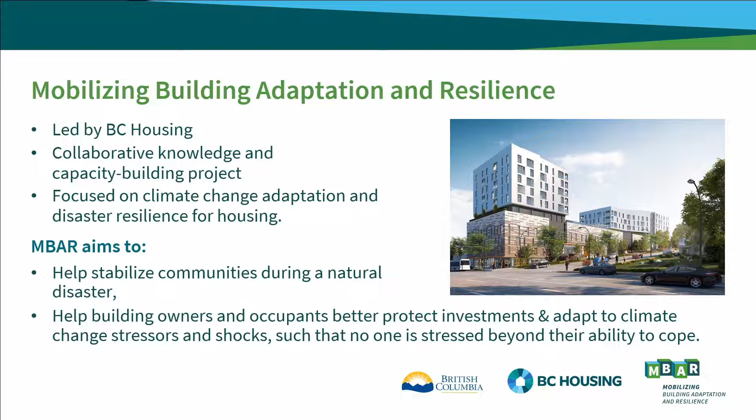So in previous sessions, we focused a lot on the structural performance of a building, the behavior of the structural system, the means to try and make it perform better than code to a level perhaps of no structural damage. But what the structure supports are all the other aspects of a building to make a building habitable or functional: mechanical, electrical, architectural components, and equipment. So what are the specific requirements for occupants to remain in the building or the building to be functional for all weather conditions after that design code level earthquake?

Currently, there are no worldwide standards. There's nothing specific in the current building codes regarding performance of the inner workings of all these pieces of equipment and components. What the code is focused on is ensuring the seismic restraint of the equipment and components is adequate so the components don't move from the floor or the wall or the ceiling that they're connected to, but nothing about the actual inner workings due to strong shaking.

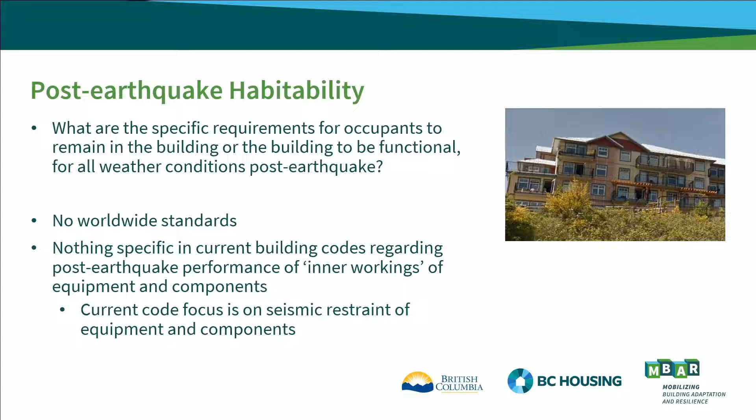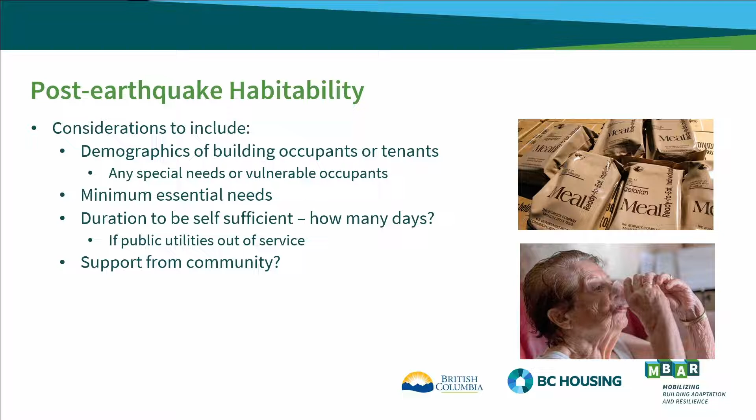So in considering post-earthquake habitability, some of the considerations are: what are the demographics of the building occupants and tenants? Are there any special needs, any vulnerable occupants? That may make the post-earthquake requirements different for each building. Listing out what are the minimum essential needs after an earthquake if all the occupants or tenants want to remain in there. And if so, for how many days? Is it the intent to be self-sufficient if all the public utilities coming into the building are out of service for a certain amount of time? Or can a certain amount of support be relied on from the community?

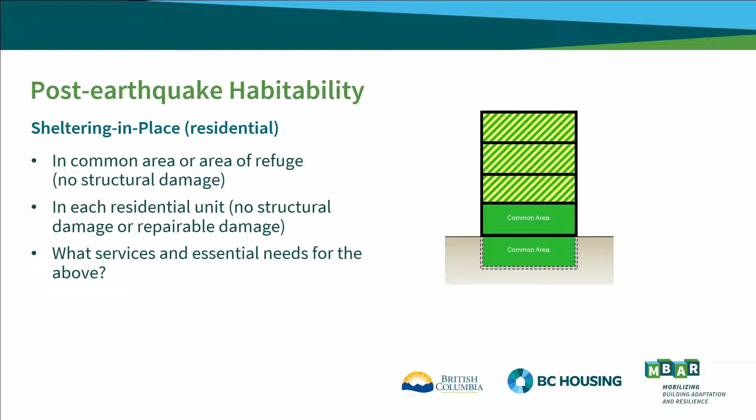And again, in the design of a new building, these are some of the things that need to be considered. Power. What are the minimum requirements for cooking, either in those areas to stay in their units above or in that common area down below? One elevator or all the elevators? The amount of lighting, the amount of heat, the amount of ventilation, all these to meet those minimum defined essential needs for the various different parts of the building.

Water. How many days should be stored on site for drinking, cooking, and personal hygiene? Sanitary, if the utilities outside the building no longer function. And again, there's an opportunity in every new building to customize and tailor these requirements for that particular group of tenants or occupants.

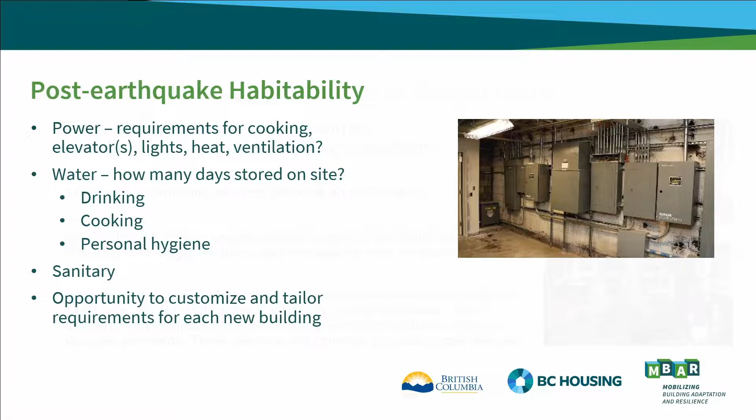These are some examples from an owner's contract with the design team to address this post-earthquake habitability and to ensure the design team takes this under consideration in their design. And these are words taken from the actual owner engineering contract: the need for continuing services following an earthquake.

The facility will remain operational and usable for its intended functions during and immediately after an event, and a list of essential services to be designed and constructed to post-disaster standards. However, these services will continue to function post-disaster. So these kinds of words can be put into a design requirement to ensure an owner is getting that level of performance from these components and equipment during and after the earthquake.

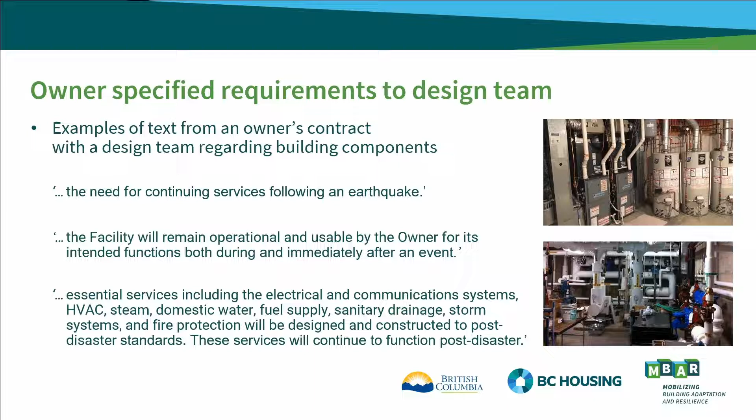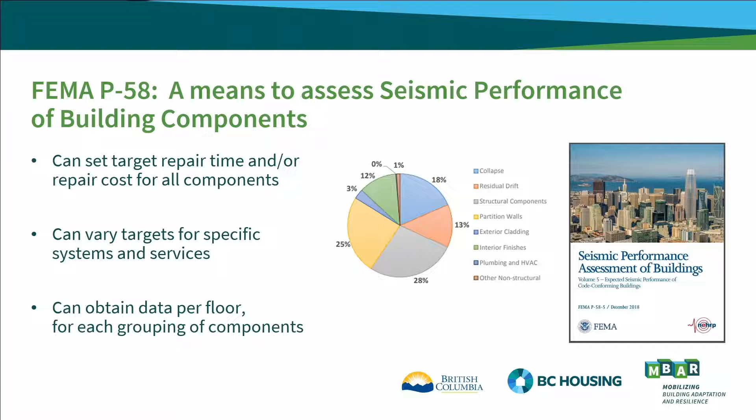It's now possible to obtain data on a floor-by-floor basis for groups of components on that floor to define repair times and costs, to that level of granularity. And all this is to enable adjustment of the design of the components in the early phases of design to suit those performance targets for habitability.

On some projects, owners can actually specify that the design team liaise with the future operations and maintenance staff to interpret these FEMA P-58 results, to really demonstrate that the behavior will comply with the performance targets.

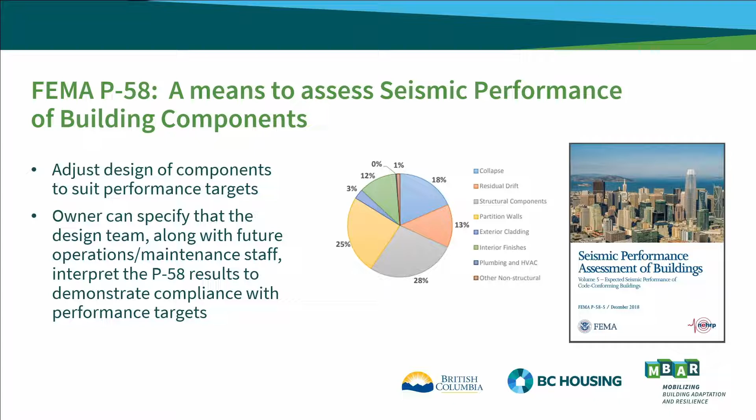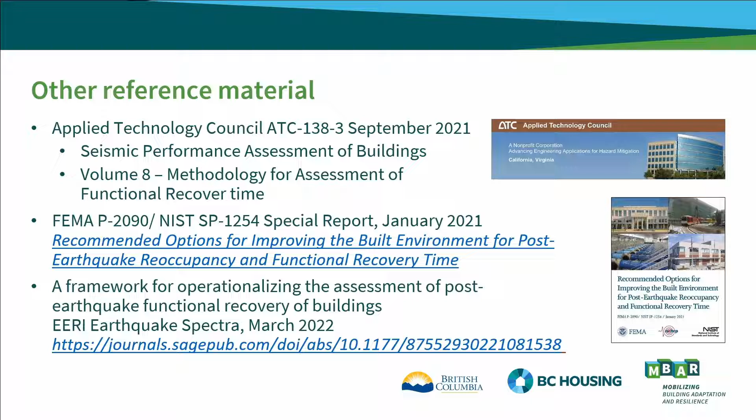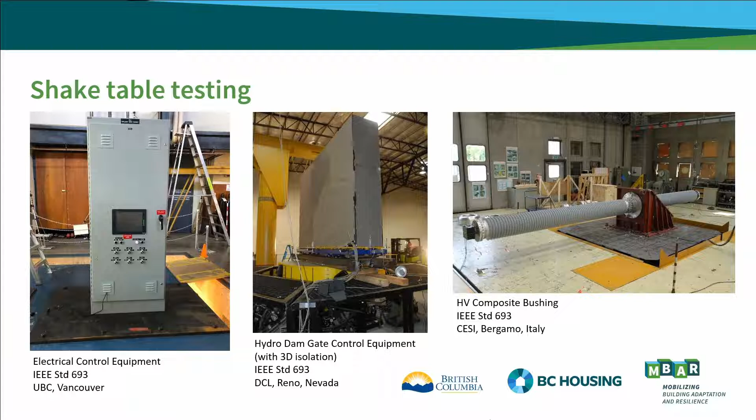And finally, some slides of some shake table testing that has been done in various parts of the world. In Vancouver, you can see at UBC shaking of some electrical equipment, hydro dam, and some bushings in Italy. So there's extensive shake table test facilities in North America and indeed all over the world. And a few other pictures just to show testing for chillers and air coolers and the like in San Diego.

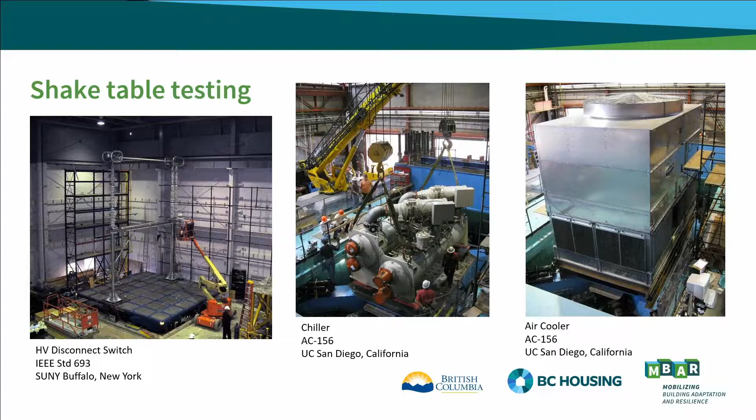So to summarize, in building codes there's currently no detailed requirements for functionality of the inner workings of the components or equipment, nor regarding ongoing operations for each of the three importance levels of buildings that we've discussed in previous sessions. There's currently no go-to national or provincial material. Again, I presented a variety of documentation. There's a lot available for review to customize the habitability goals and performance targets for a specific building.

One may want to consider FEMA P-58 methodology to define repair time and repair cost for all these components within a building. Again, at the end of the day, an owner can specify and customize habitability requirements as long as the basic code requirements are met. It can offer language in a contract with a design team to address these and to try and achieve these habitability targets. And it can even specify shake table testing for critical components that are essential to operate both during and after an earthquake.

So that concludes this session. The next session will be on seismic upgrading of existing buildings.